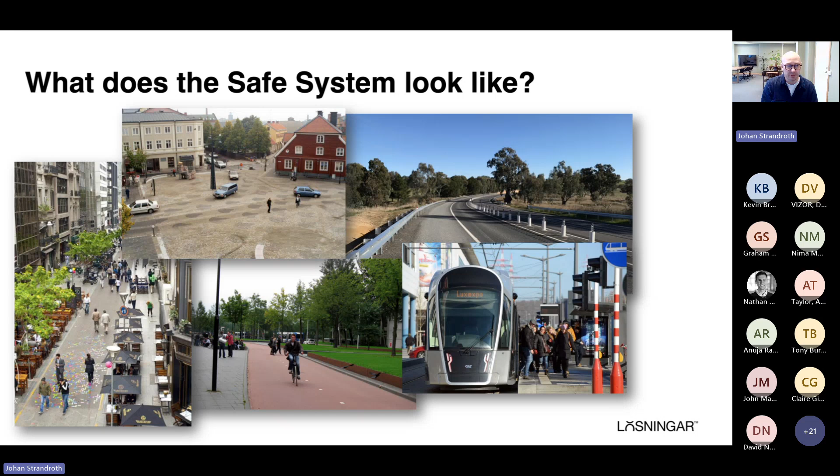The next step is to acknowledge that we're humans and that we have a certain human crash tolerance. Our bodies can only take so much when it comes to physical violence in an impact. And if we want to be moving in a truly safe system, we want to make sure that crash forces are never above those human biomechanical tolerance levels. And we've been fed these types of what we can call boundary conditions on maximum impact speed for us not dying or getting seriously injured.

And it's been very useful in trying to design a system where we don't crash head on above 70 kilometers per hour, or we don't have side impacts above 50, or we don't have vulnerable road user impacts or side impacts with trees at more than 30 kilometers per hour. And that's all good, but science has taken us a long way from that, where we are a bit more advanced today to understand a bit more on the impact biomechanics, and how that relates to different types of road users, different ages of road users.

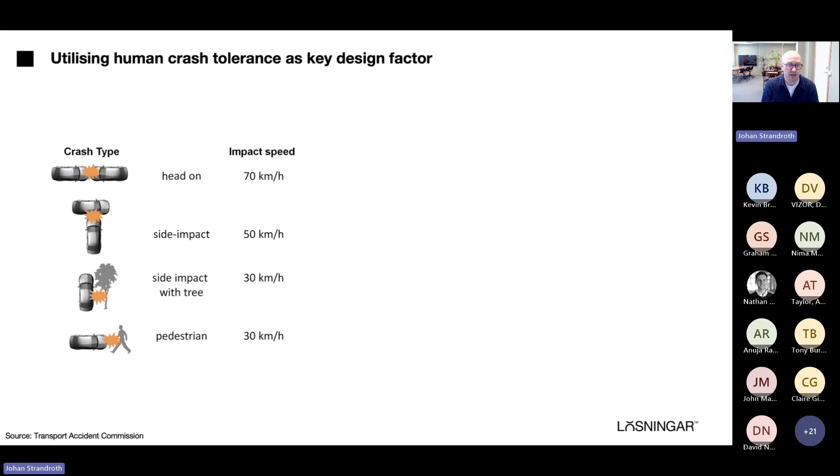And plus, we have a lot of modern vehicles coming into the market now, which potentially can brake before collision and bring down travel speed and impact speed before the collision, which means that travel speed could potentially remain a little what it is today and still be safe, even though it's unsafe for an old vehicle. So we're coming to a stage where we have a lot more knowledge on acceptable impact speed and thereby acceptable travel speed. And we can use this to design that safe system. But we need to know a little bit more about this biomechanics.

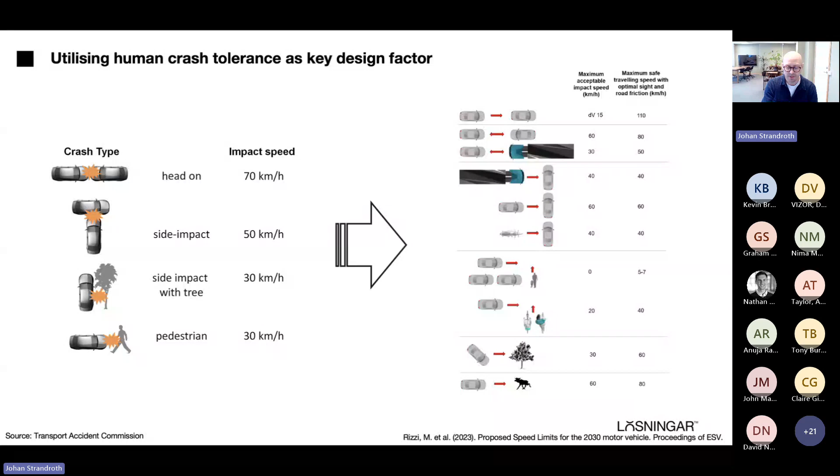So if we combine what we talked about before, the transport plan, movement and place, or movement and links, with our biomechanical tolerance, with modern vehicles, we'll start to understand what our infrastructure and our urban areas need to look like. But it is based also on accepting that this is a holistic view that we need to have. It's a combination of vehicles, infrastructure, and of course, us as road users acting in this system.

So we start by saying that, if we're aiming for zero by 2050 as an example, we know that it normally takes 20 years to turn over a vehicle fleet. So it's really the new cars in 2030 that are going to be the bulk of the vehicle fleet in 2050. So we need to understand what that vehicle fleet looks like. What are those systems? How do they work? In what crashes and impacts do they work, and how do they work? And then get into the understanding of movement in rural areas, for example, to say that we have high road movement, roads look a certain way, intersections look a certain way.

And I'll just briefly go through this for context, and then we'll get into the actual analytics. So if we want high speeds, obviously we want a high level of potentially more costly infrastructure. If we're talking about lower movement functions and lower movement needs, we can afford to actually reduce the speed limit and still maintain a good level of accessibility and transport, and combine that with a not so high level of infrastructure in terms of investment. So it's really that balance between high speed, lower speed, and infrastructure matching that speed in a safe way.

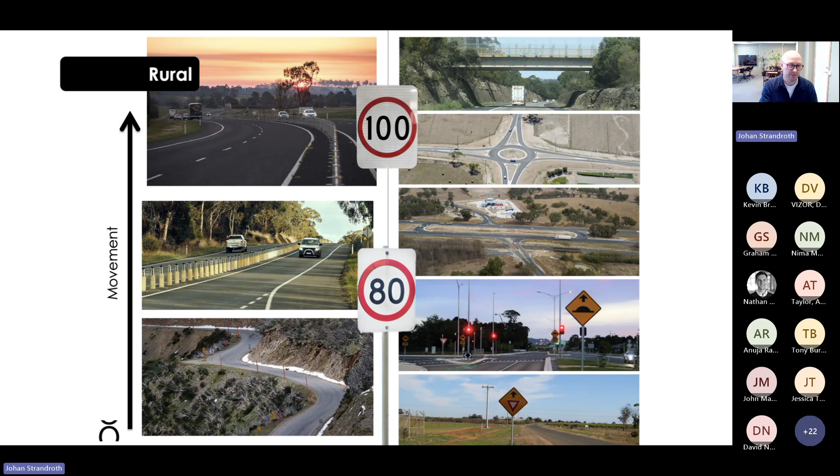Same in urban areas, but then of course we're still talking about the need for high movement and high functionality in terms of moving goods and people, which are your divided freeways in urban areas. But we're also talking about active transport, public transport, etc. And we're talking about solutions where we have mixed use traffic, where we mix vulnerable road users and cars and trucks, and potentially also public transport. So of course, a more complex situation, but also a very promising type of development that we see around the world, where we're going more towards acknowledging the need for more active transport, placemaking, etc.

So how does that impact the way that we do our analysis? Well, what we do is start by saying we're starting with a certain road stereotype, for example, the top right one here, and say this is the current state. That has a certain movement function and a certain functionality of moving goods and people. It's not a freeway, it's not a highway, but today it actually has a speed limit of 100 kilometers per hour, and it doesn't have very much supportive infrastructure. And what we see as systemic crash types on that road is head-on crashes, single vehicle crashes, and some rear-end crashes as well.

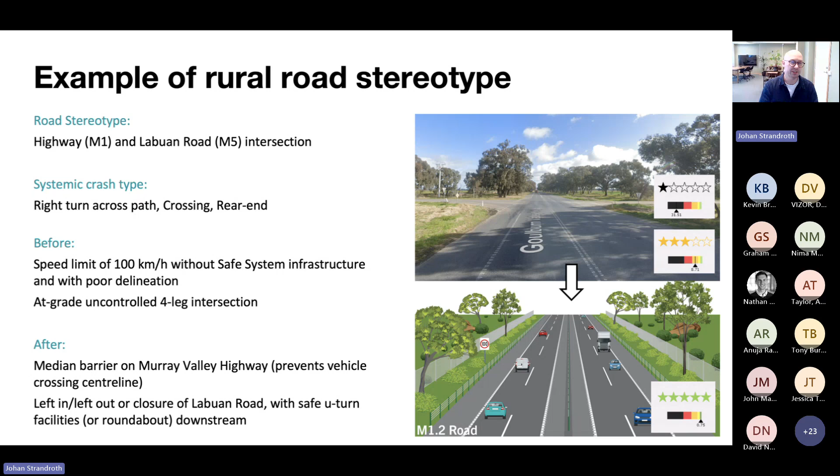And I don't think this is rocket science in the sense that this is totally new. The new aspect of it is that we're defining from the start what that 2050 picture should look like, to then move back and say, well, how do we close the gap between what it looks like today and the future state? And how do we use trauma modeling to understand the best way to get there and the most cost-effective way to get there? So the next step is a system assessment or a gap analysis.

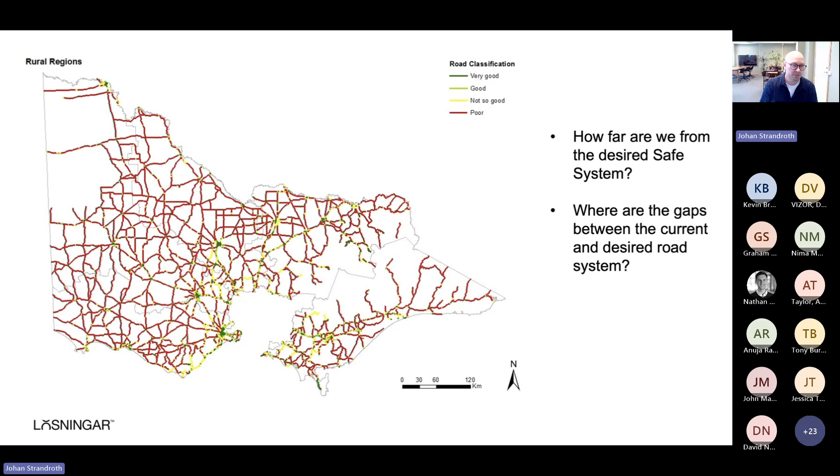And I'll move through this very briefly, but just to say that you can take a state, a jurisdiction, a country, and just overlay the assumption on what that future system should look like that we just saw, and say, what proportion of my current road network actually looks like I want it to look in the future? How far away are we from that desired safe system, and what are the current gaps? And I can start to break that down into my divided freeways, my undivided highways, rural arterials, and say that there's a certain proportion here that is acceptable, and then there's some that are not acceptable. And the same in urban areas, of course.

And by doing this, I'm moving away from just having a vision, a target of zero by a certain date, to actually having a tangible gap to say, well, if that is to be true, here's the number of kilometers that I actually need to transform.

Here is a number of intersections that I need to solve. Here is the placemaking that I need to do in my city. Or here are the policies in relation to road user behavior or enforcement that I need to implement. So it goes from being a bit blurry to hopefully a more clear action plan on what I need to do in the next 30 years or 20 years or 10 years, depending on how I've sort of outlined my targets.

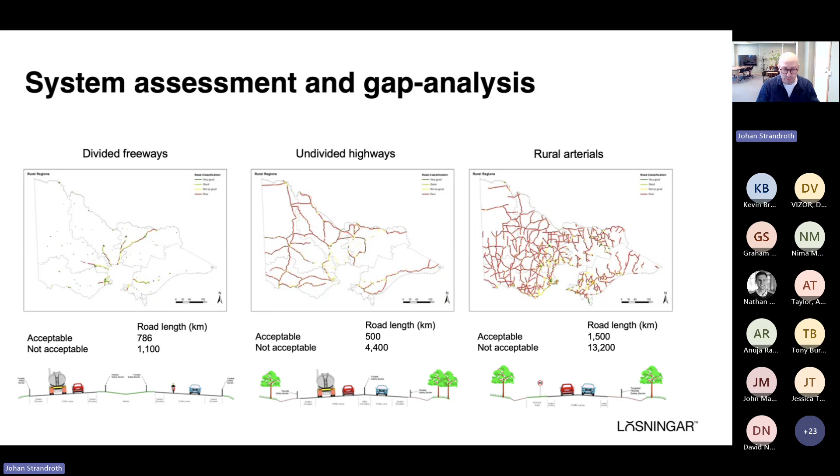Now, following this, we're going into the actual purpose of this presentation, which is case-by-case analysis. Because the question comes here really, where do I start? I understand my gap now, but where do I start? Should I start with my easy wins? Should I start with my high-risk road location? And how do I do that over time? So that's where we start with baseline modeling with case-by-case analysis, as we call it.

And it goes back to what Nathan showed in the beginning, where this is the trend for fatalities in Sweden, which conceptually looks quite similar to the UK from the 70s, and actually looks quite similar in all motorized countries, where we have a spike with motorization, and then a decline where we start to implement road safety policies. With this, we can see that there's a long-term trend. We have some ups and downs depending on economic fluctuation or other spikes like seasonal variation or COVID or whatever it is. But overall, we have a long-term trend.

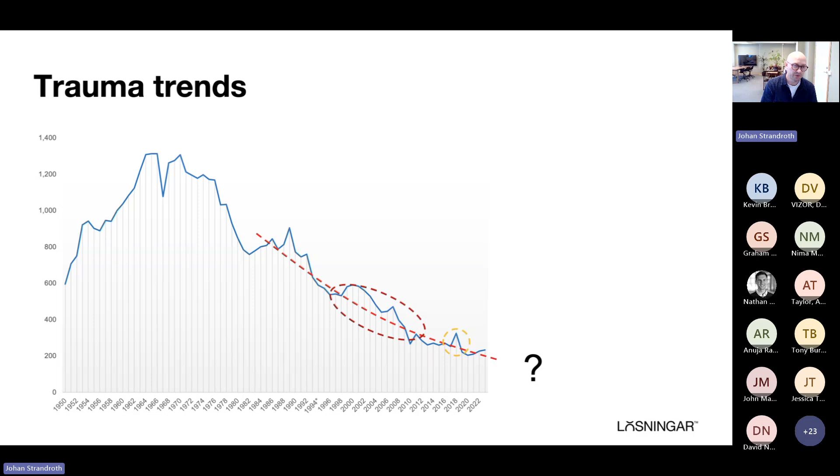And the question is, of course, where are we going? If we just continue doing what we're doing, where will that take us? And how does that compare to the targets that we've set out? So conceptually, we have a retrospective trend. We have a business as usual development, where we say that we can just extrapolate this development into the future and see where it takes us. And then we want to compare that to a target, in this case, zero by 2050, and conclude that there's absolutely a gap here: if we continue business as usual, we're not going to achieve that target, and there's going to be a significant gap. So this is all guidance for us to understand how much we need to do.

There's a few problems here, though, where traditionally what we've used to try to understand where we're going is time series modeling or other types of statistical models that give us a number in the future. So they would project or forecast a certain number at a certain date based on a retrospective trend. And that is all good. We're not here to say that we're not going to do that, because all of these different methodologies complement each other and are good to do.

But when we started to look at this in Sweden in 2012, because we wanted to set our targets to 2020, what we realized is that we can do those forecasting models to understand where we're ending up in 2020. But we don't know much about what those crashes actually look like. We don't know much about the characteristics of what we call residual crashes. We don't know who they involve, what the actual circumstances around those crashes are. And because we don't know that, we don't know how to target our interventions in the most effective way.

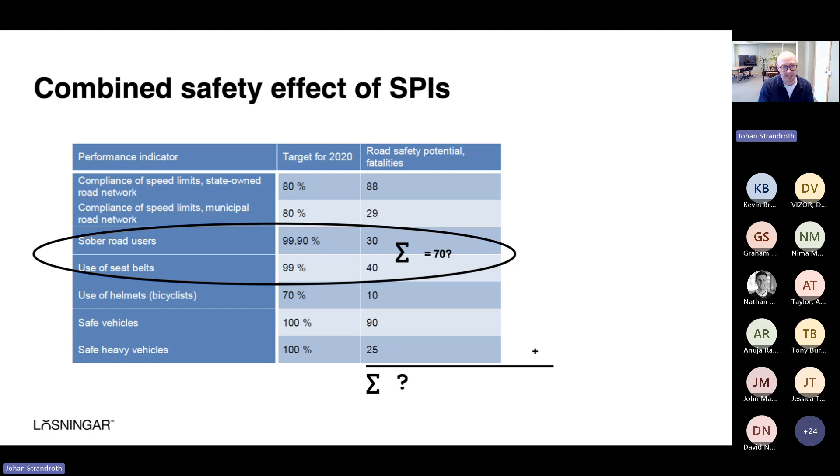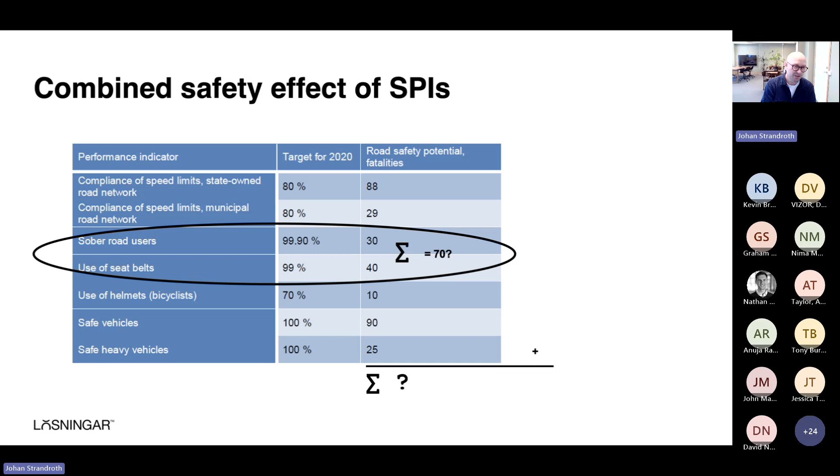Well, we cannot, because these crash pools overlap, because there are a lot of road users that are impaired that are fatally injured without a seatbelt. So the combined effect of addressing these risk areas is less. And you can do, again, statistical assumptions on how big that overlap is, but it would be much better if we can go in case by case to actually understand the exact relationship between these different risk factors, and not only these risk factors, but all other risk factors in all fatalities and injuries. So that is another aspect to take into account.

So when we developed this methodology to understand what future crashes look like, we wanted to understand what level of safety the road transport system was at on a given date, and also identify necessary safety improvements and their combined effect to be able to develop response scenarios and a strategy ultimately. And we had a few requirements there. It needs to be transparent to enable stakeholders to understand and take part in scenario development, and needs to include fatalities and injuries. It needs to be able to describe the characteristics of future crashes, and be able to handle what we just talked about, double counting, dependencies between treatments, etc.

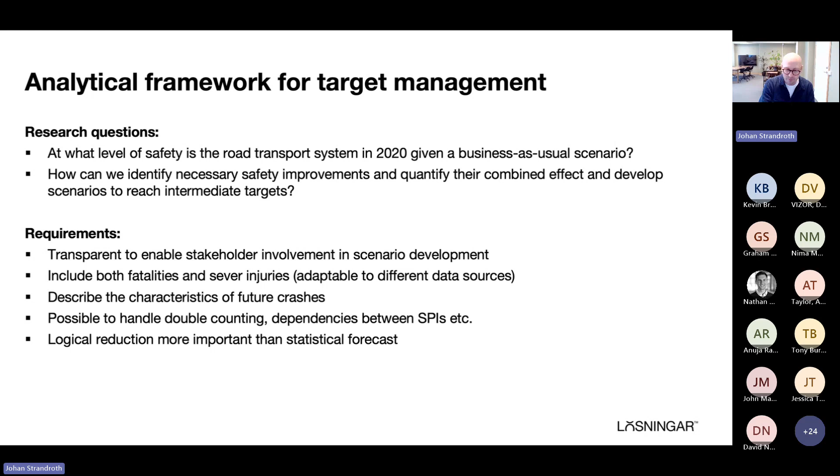So hopefully with that long introduction and justification, we'll get into what it actually is. So it has a few different names, but it's been done before, not only in my and Jet's research, but in other research. And the other name for it is counterfactual analysis. And it's sort of a what-if analysis. That's basically what it is.

And this is illustrated here with a chain of events where crashes happen, which is quite common to use in accident research or crash research and investigation. And this is illustrating that a crash normally goes from a situation of normal driving, something happens that makes things deviate from that normal driving, and goes into an emerging situation, critical, and then crash unavoidable, and then there's an injury or fatality.

Now, in that sequence, we can introduce a number of different interventions that either return the car to normal driving and you continue to drive or ride or walk, or you go into a crash unavoidable phase where we say that we can still mitigate the outcome of this crash by crashworthiness and barriers and protective equipment, etc.

So this methodology then says that, well, if we have a crash, in this case, because it's a research paper that was part of my research 10 years ago, it takes crashes from 2010, and then it puts a what-if question to that and says, what if this car were equipped with certain technologies? Or what if this street had safety features or speed management introduced? Or what if there was a barrier there, etc. So it designed some strict protocols around when does the system work, how do they work, and if they were in place, what crashes would they actually prevent?

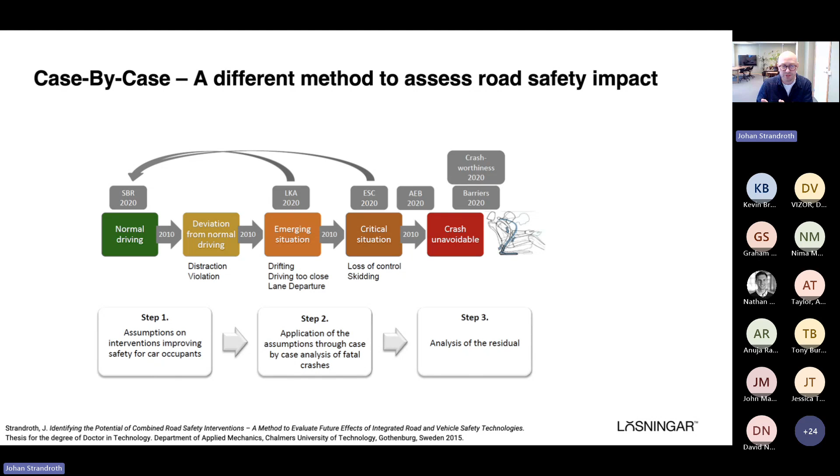And step three then is to try to understand a bit more, okay, here are the crashes that were avoided. Here are the crashes that I expect not to be avoided. Let's look specifically at those crashes that are not estimated to be avoided, because those are the ones that I want to focus on when I develop my strategy.

An example of what it can look like is this. So, for example, if I'm in year 2020 and there's a crash involving a BMW or any car from 2005, so a 15-year-old car. And this is an actual case in Sweden. It was on an undivided two-lane, two-way road, wide shoulders, some targeted barriers, and there was a loss of control. Skidded off the road, started to roll, did not use a seatbelt, was ejected out of the car, and crushed under the car, and then the car was lit on fire, and there was a fatality.

And the question is then, well, if we project that to 2030, would that look different? So we take that car, project it to 2030, and in 2030, a 15-year-old car would be a model from 2015. And that car by regulatory standard would have both electronic stability control and seatbelt reminder. We also know that we have a pipeline of infrastructure investments that's already funded and ongoing. So this road will be a 2+1 with full continuous barriers, or 2+2 with full continuous barriers.

So what we then say is that the dynamics of the crash, the specific circumstances of the crash, were such that these systems would actually prevent it. And not only the vehicle systems, but also the road. So the vehicle safety systems would prevent the crash from happening in the first place. But even if the vehicle systems were not there, the road would probably prevent this crash from being a fatal crash.

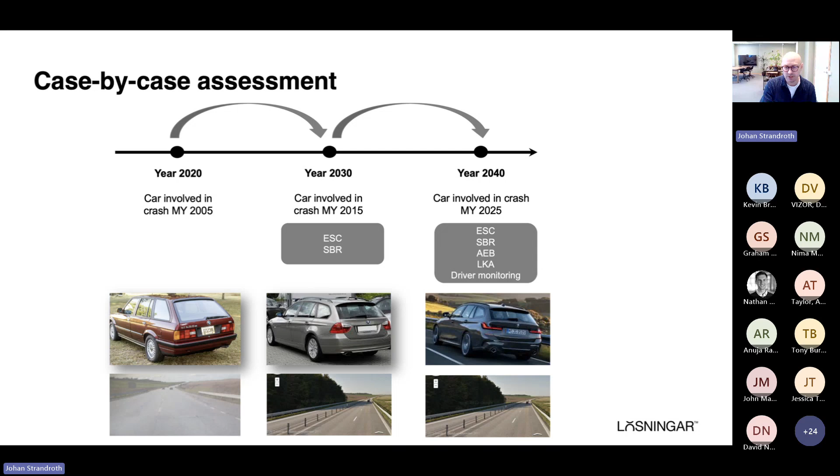So the first way that we actually use this is in the strategy development, to validate that end state that we were talking about. So let's say that we've defined what the road should look like, what vehicles should look like, etc. We want to understand how close to zero would that actually take us.

So we have all these systems. We go through all fatalities in a jurisdiction and a country. We apply what that end state should look like. And then we say, how many of those fatalities do we think are actually going to be prevented and not prevented? So solved by a safe system end state versus not.

And we can see in most jurisdictions, we end up around 80, 90%. So with the already accepted and used interventions, we can come pretty far. It's all about implementation, really. But then there's 10% that's normally quite a challenge. So depending on how I've designed my end state, I can use this to say, well, these 10%, what are they? What else do I need to do? How do I need to modify and tune my system to also cover that?

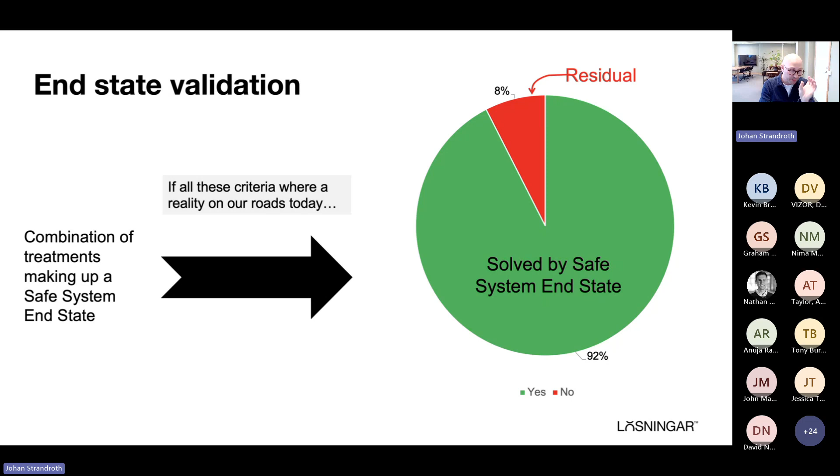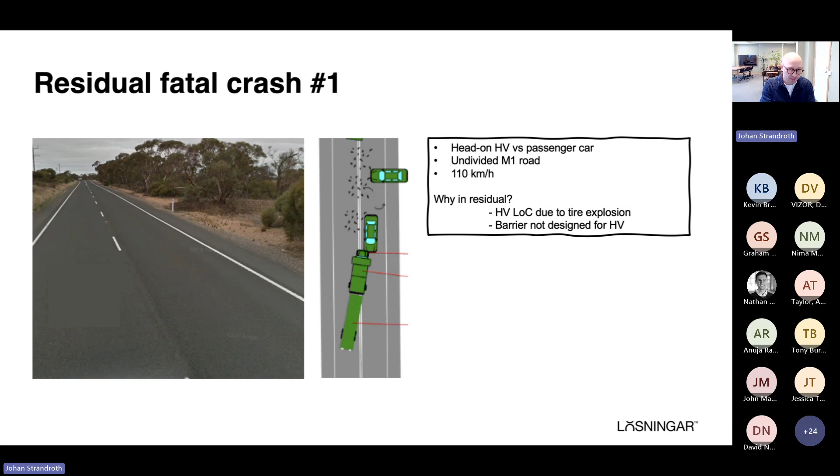So, for example, I can look at those 8% and say, well, here's one crash that was deemed not to be prevented. It was a head-on crash between a heavy vehicle and a car, and it was a tire explosion on the heavy vehicle, and the barriers were not designed in my end state to be able to withstand that heavy vehicle, so there's still a head-on crash. So that gives me more detailed information than what a statistical method can do, to say what exactly I need to change to actually make this not happen in my end state again.

Another crash with a motorcycle, single fatality. In this end state, it's not a highway. It's more like mid-low volume roads, which have a speed limit or a speed reduction, and certain assumptions on what the roadside area would look like. But these barriers that we would target here would not take into account motorcycles in a sufficient way. So this motorcycle crash is also expected to be in the residual crashes.

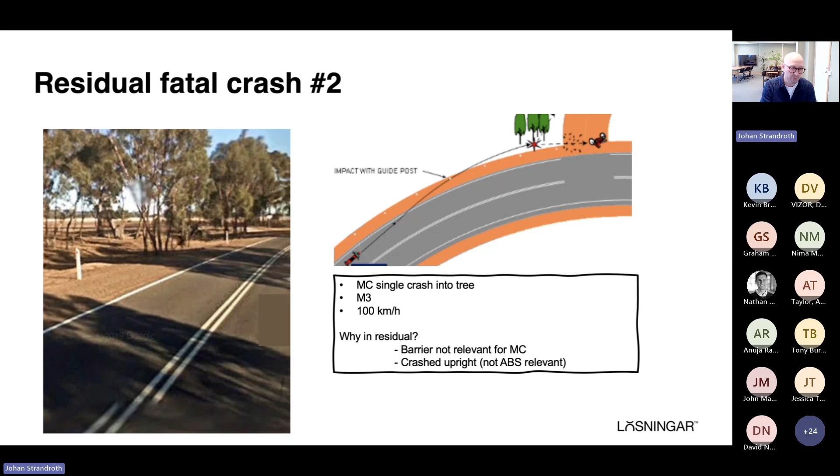So, of course, you cannot guarantee that that sandstorm is going to happen exactly in the future, but what you get is an understanding of the unique circumstances when you go through enough cases, where you get a certain saturation for those unique crashes. And well, okay, it'll take 90%, but there are some exceptions which we also need to take into account if we're really serious about zero, and this is one of those occasions.

So I can gather all this up and I can look at my residual and I can ask myself, why are they there? One would be implementation time. So let's say that we're looking at 2040 and 2050, but even then, the vehicle might be so old that the system that's going to prevent this crash is not expected to be implemented yet. And then we have the middle case, which is no relevant intervention. That was the motorcycle crash that we just talked about.

And then we have what we call outside effective envelope, and that is more the sandstorm that we were talking about. There is a system that is designed to prevent this. It will be implemented in time, but it's not tuned to work in these circumstances.